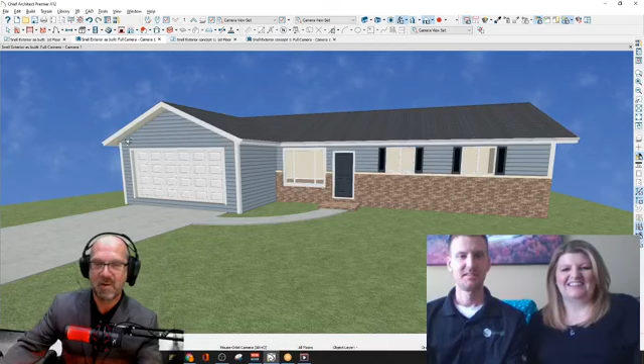Yeah, so what that means is how the soffit is on a house. When we look at your house here, we actually don't have a level or horizontal soffit. As you can see, these come straight down, and the soffit, the underneath side of this roof, is actually angled. In a lot of houses, that's a horizontal area, and the corner right here is boxed out in a way that you can see it boxed out. Like this would be—let me show you a good example of that. Like this case right here, this is what a pork chop is. So it would be a barrel ceiling, fascia, and pork chop.

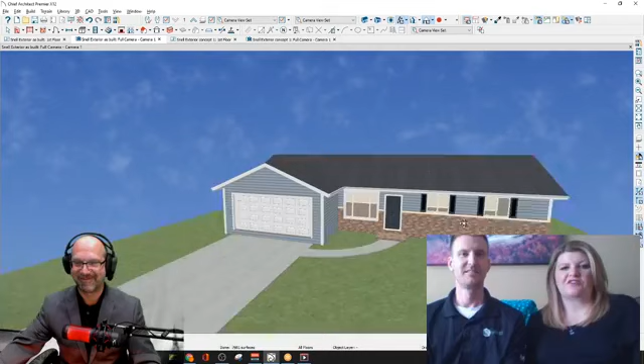Funny term, but it is true. And the barrel, I love the barrel. That is something I am just adamant about wanting. Versus him, not so much.

Well, I know, John, you mentioned you're always bringing this up. It seems like you're also 50% of marriage counseling. So, you know, it's funny. Yeah, sometimes 30, sometimes 80% marital counselor, depends on who I'm working with.

But that is actually the favorite part of my job because as a designer, I've been designing for a long time, 30-something years. When I was young in my career, I used to design for myself and what I liked, and I was building a lot of new homes. But as I matured in my role as a designer, one of the things I really embraced was working with clients and couples just like yourselves that have a difference of opinion. And that's almost 100% of the time.

You guys are right in the norm of everybody else, approaching it from a different point of view. I'm no psychologist, so please, I don't even play one on TV. Part of this process of designing a project like that is also getting to know each other and find out what you guys gravitate towards. And almost 100% of the time, we find a middle ground that appeals to both of you.

But sometimes it's really difficult to drive through the neighborhood and find a live example of that, because when we're creating something like this, it is a little bit of an art. With all the technology, the glitz and glam, rendering and stuff like that, there's nothing really quite like taking it back a step and bringing out our inner artist. In this particular case, what we're looking for is something that doesn't exist, so it requires an artist's touch.

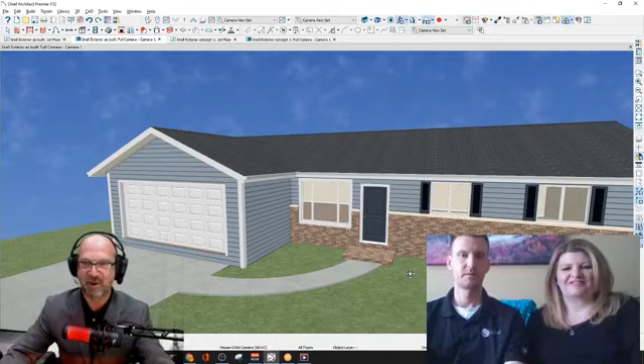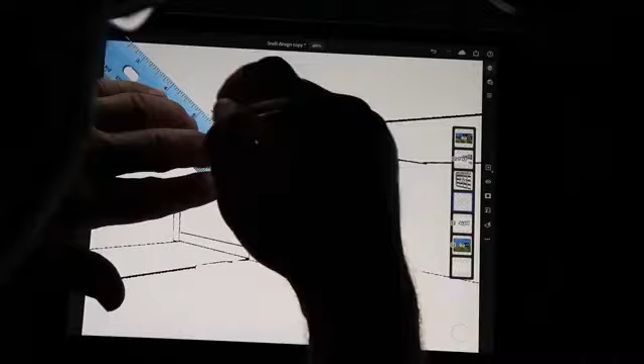Yeah, somehow I ended up getting my hand in the shot too. So I was just working away here. Okay, you can tell you're very into it. Yep, yes.

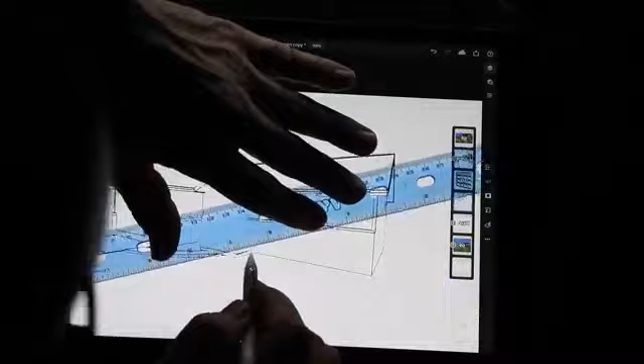Is this in Chief Architect, John? Is that the program you're using? This is by hand, actually. I drew this because we talk about being an artist, and it's important to me to sometimes just connect with space when I'm drawing it. I learned 35 years ago how to draw by hand, and every so often I do that. So I actually use Photoshop to draw with. Okay, I wasn't sure what the program was, so it's Photoshop. Okay, that makes sense.

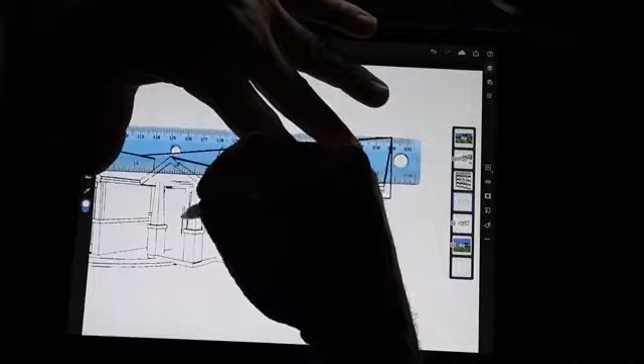Yeah, I use a couple of different things, and I just draw on my tablet. I hang out, put on my music, get in the zone, and start drawing. Odin thinks about all his fun facts in the background, I think that's where he comes up with it. He's like, Dad, I'm so bored, please. Gosh.

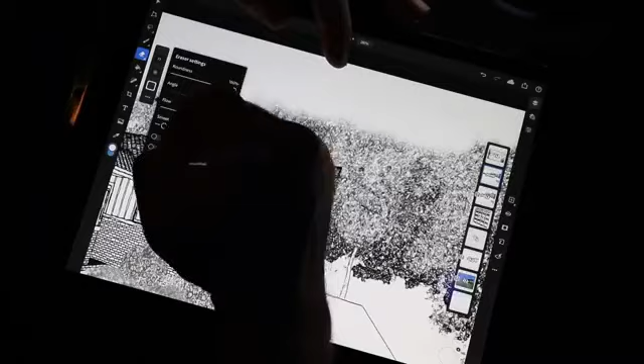I like how you're bringing in some old school elements like hand drawing, but with new technology on the iPad. That's pretty cool. Yeah, I use texture maps and stuff like that, so it's way faster than when I was a kid in the 80s, having to draw everything with pencil and paper and erasers. This really speeds it up. I use texture mapping like right now, whereas I used to literally use watercolor to paint this.

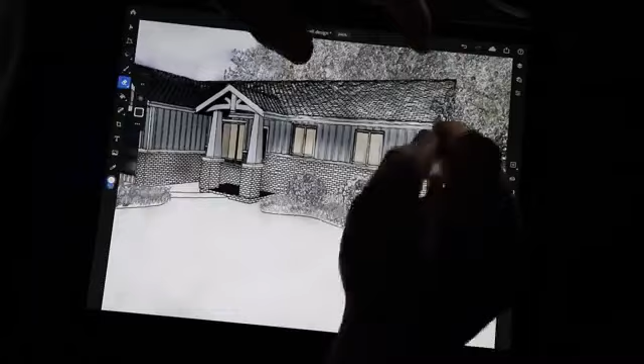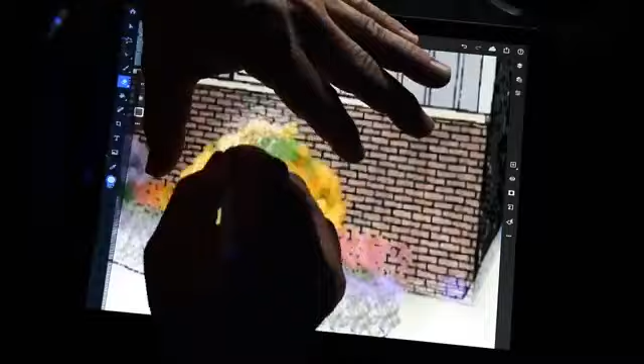It's definitely an art, that's for sure. Holy cow. Oh, there you go, getting the colors in. Yeah. I really enjoy it when I'm creating, it's just so much fun for me. I get lost in it, yeah, but it's a good time.

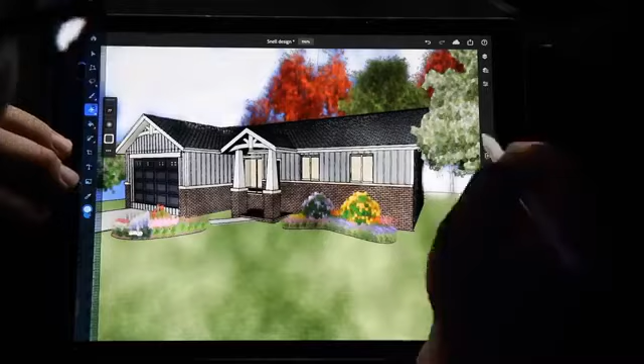Oh my gosh, it is therapeutic to watch this, truly. It is.

Yeah, so that was my idea, and like you said, it was a process, super enjoyable to do. But I was able to bring it into this here, and I pulled it in virtually, and we could talk about a couple of the elements I was thinking about.

So in this here, as you can see, I did a photo image overlay onto the front of your house. I actually integrated the picture that you sent me, Brad, into this design right here. We have a couple of cool things going on, kind of bringing that old school, new school look together.

I kind of feel like we need to do more in the whole front of the house here. Whether or not you change this - I know this was in your intro video that you were thinking about changing - honestly, as a designer, I'm neutral on it. I think it has a certain amount of appeal to it. I know you guys are at odds, and if you want, I'll be the tiebreaker eventually on keeping the shutters or not, but that's not where I saw the most improvement needed.

One thing when we stand back and look at this - on your existing house, where we really lose our visual is that your garage door and your front door don't match in color, and we don't have an element that carries through to the front of the house. So it's going to be important in this case to tie the elements together, making sure your front door and garage door match and look good together, because you have a lot of dimension in your house.

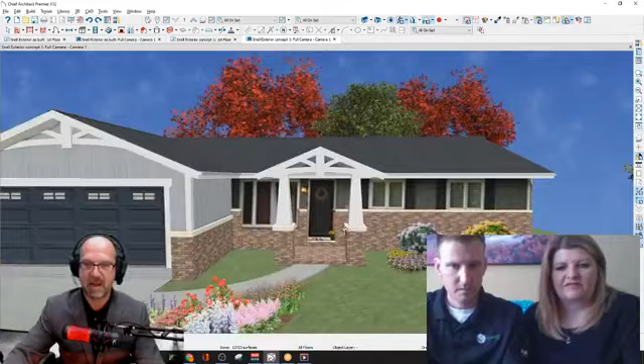Hey John, can you bring that on a bigger screen as well too? Oh yeah, sure, let's take a look at it here. Perfect, thanks, yeah there we go. Is that better? Yeah, okay perfect. That's so much better, awesome.

I love those craftsman style columns too.

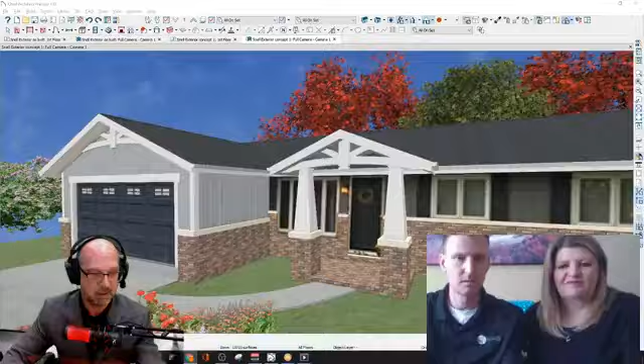So what we have here is, in my thoughts, and certainly we'll talk more about this, we're bringing kind of two elements together, right? We're not going into the full-blown rustic elements like this right here, because that would be hard to pull off in your area.

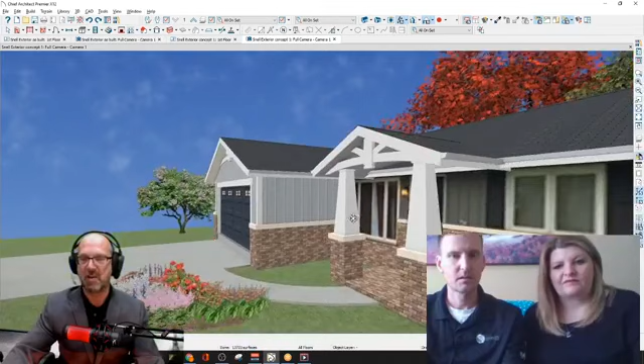But we're not going too far this way either and getting into that colonial look that we were looking at before that somehow disappeared off my page. We're kind of drawing a nice middle ground, and we're still able to get that barrel vaulted ceiling going in here with some beadboard.

So the interior surface will still be beadboard, but these details like this we can work through. I just kind of used this because in your video you talked about a barrel vault, and doing something like this with the curve on it will allow you to do that.

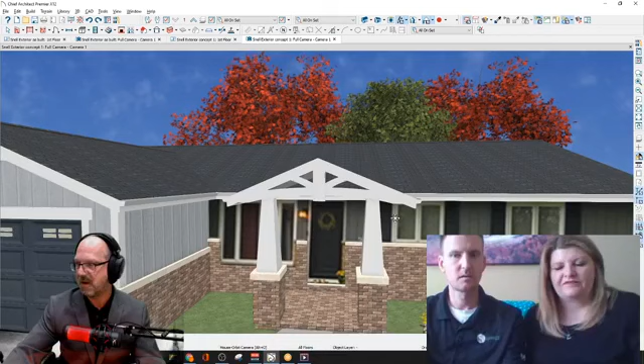And tying it back over to the front of the garage here is critical, because when we look at it from the street, connecting these two elements right here draws a totally different look to your house.

And you nailed it with the garage door. Brad's been bugging me since we moved in for a garage door like that too. Well, it's fitting. We always thought white.

Well, I wouldn't do white, because if we have the white trim, you have the white trim in other parts of the house and you want it to pop.

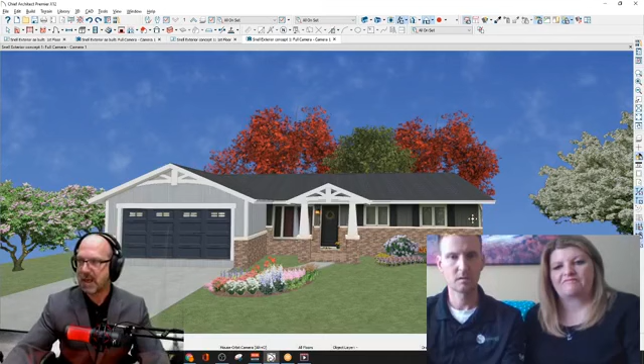And that's where I'm neutral on the shutters, actually. With this right here, we have this color door, and then the shutters that match those, it really does a nice job of balancing things. So I don't think the shutters are the problem, they actually look nice here, but a lot of times though...

Here's the crazy thing about what I do: you guys coming to me with something that you don't like about your house is actually probably the majority of the time that we're working on a project and I'm engaging with somebody at the design stage. That's going to be the case. They don't like something, they try to self-diagnose, they try to figure out what they don't like about it.

And sometimes, even me, I've been doing this a while, I need to sit and just kind of zone out, put my music on. And I probably approached your project two or three different times, and then finally something clicked. The artist in me, I just connected with the space, and this is the result of it.

I never thought to take the brick around. I think both of us have kind of been at odds with that, because right now we currently have brick on the house and then brick on the front step. I liked the brick. Brad didn't like that it was two different kinds of bricks, but they went well together. So seeing it pulled around to the garage, love it. Just took the house to a whole new level.

Like blown away. Yeah, I know when John showed it to me, I got a little sneak peek of it. I like that it's kind of a little bit of what you both were looking at, as far as being traditional and modern. I think John, you did a good job of combining the two and making it kind of a middle ground there as well.